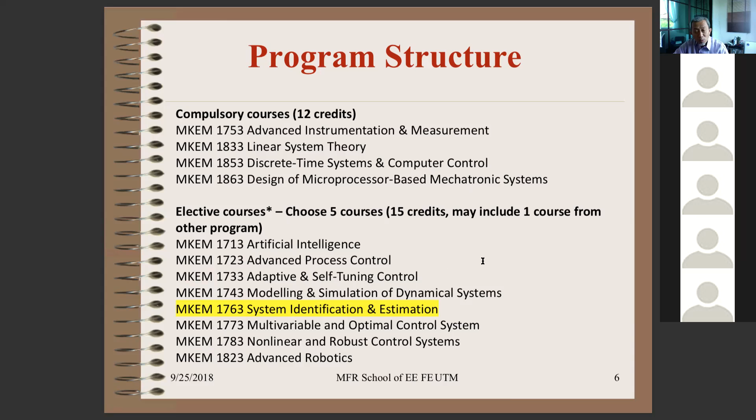And then another 1 course, if you want to take MKEM, also can. But some students would like to take other elective subjects from other courses, which is MKEP on power system, or MKEL, the Master in Electronics Engineering, Electronic Telecommunication Engineering. For example, a student might choose wireless communication technology, offered in MKEL, or power system engineering in MKEP. It depends on you if you want. If you don't want, you can simply choose 5 from the MKEM elective subjects.

And then after you finish your subjects, about semester 2, you will take the MKEM projects, which is Part 1 and Part 2: Research Project Proposal and Research Project Thesis, totaling 10 credit hours. You also have to take other required subjects, which is one university subject, and Introduction to Research Methodology in Electrical Engineering.

So we come back to the subjects. The objective of the subject is to expose students to the theory of system ID and estimation, and at the same time introduce students to the basic concept of reverse modeling, or sometimes we call it empirical modeling, including experimental protocol, test signal, model structure, parameter estimation, and model validation.

So this course is an introduction to system ID and parameter estimation. It covers all the system identification procedures, starting from data collection, pre-processing data, non-parametric model, parametric model, analyzing, validating, and converting models, and system identification case studies. We will go one by one through the case studies, about 4 to 5 case studies.

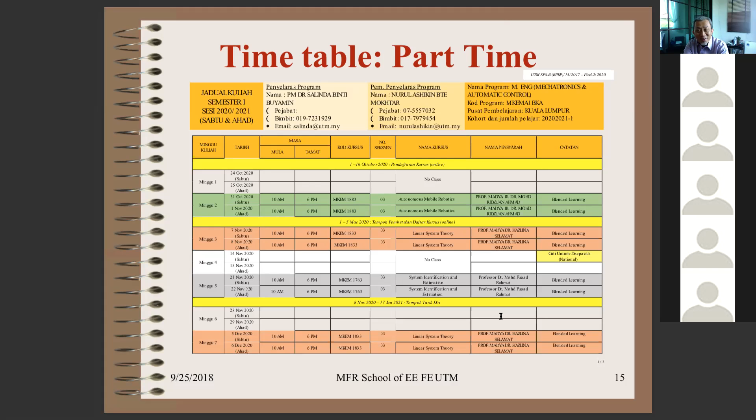Okay doktor, okay, jangan tidur pula. So seterusnya after.

21st and 22nd November class, so we will see again before Christmas, 19 to 20th December. So ini ada ujian rasanya, minggu 9 ni ada ujian.

Okay, so all the tests will be implemented using e-learning and Zoom. You will collect the exam question, the test question, download it, and then submit through e-learning at the time given, about half an hour. Katalah kita mula ujian pukul 2 dan kita tamat pukul 3:30 petang, dan 3:30 sampai pukul 4 petang tu adalah masa untuk awak PDF kan jawapan awak dan submit kepada e-learning. Semua ada e-learning? Everybody have e-learning? Ada? Yes, okay.

Okay, right, so similarly in test 2 also, we have a test 2 using e-learning and Zoom, and then we have some presentations at the end of minggu 14. Dan exam adalah pada bulan Februari, next year. Okay, clear?

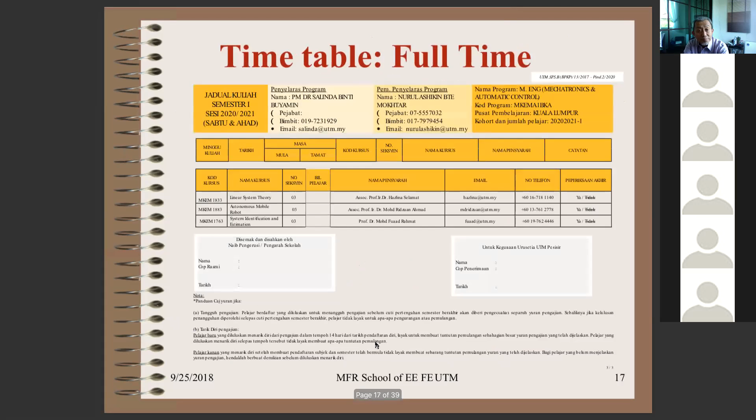So test will be on the 19th December, Saturday, okay. Then test 2 will be on the 23rd January. 23rd January, use di mana ni? Tak betul ni, 23rd January ialah berapa bulan tu? 23rd, tengok timetable tadi lah. 23 Januari pukul 2 juga. Okay, 2 p.m., pada 23 Januari.

So we will update the test time, all the details in the WhatsApp. Everybody subscribe WhatsApp. So total number of how many students currently? So we have Umar, Sivananta, Zulafi, Nur Fariza, Daniel, and Hazim. All are local, not international. Then final exam February 2021.

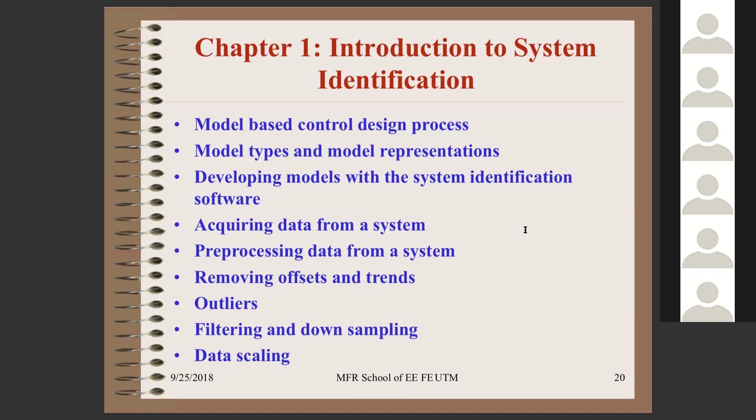So this is part time. So this is the content of chapter 1, introduction to system ID. So we will touch on the introduction, model, application of model, and some reasons why we have to use empirical modeling instead of first principle modeling.

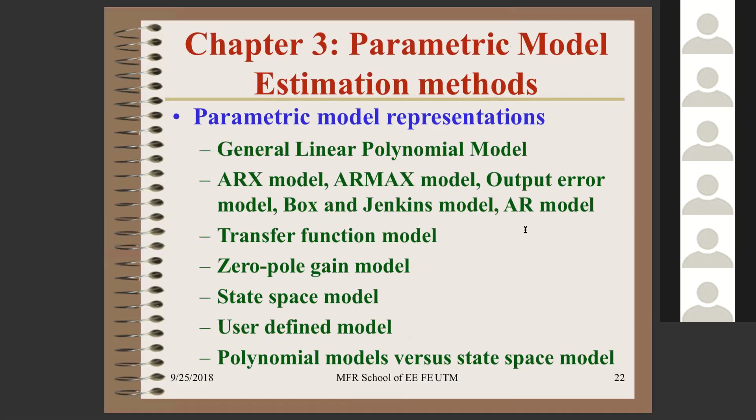And then in chapter 2, we'll see the time response, frequency response, impulse response, correlation, frequency spectrum, and PRBS signals for identification. And then we will go for chapter 3, which is the parametric model representation, type of parametric model, linear model and non-linear model.

And then semester break, I think kita tak ada semester break, kita carry on sebab kita part-time. Then chapter 4, we will go on the parametric model, which is estimation method, some methods which is least square, generalized least square, recursive least square, prediction error, model validation method, and so on. And then we will end this course with chapter 5, case studies, using data, real data from a hot air blower system, hydraulic actuator system, pneumatic actuator system, biodiesel engine, DC motor control, and so on.

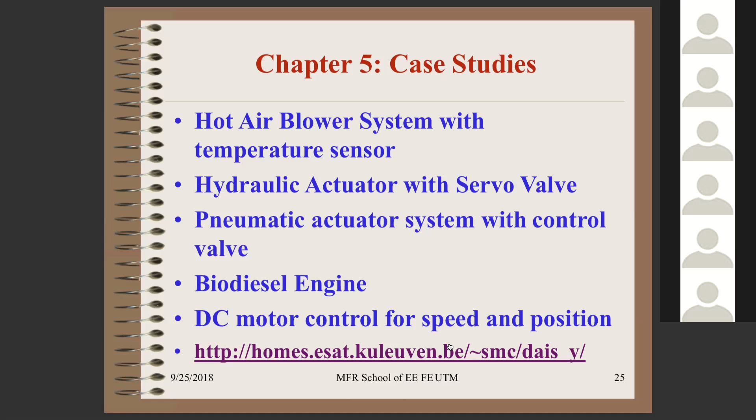Source of data is from the internet. We should share from some university from Belgium. Okay, we will use some data from there.

So to wrap up what I mentioned in the profile introduction, identification is the task of using input-output data to build a mathematical model. And this mathematical model is abstraction of the process. So I can say that...

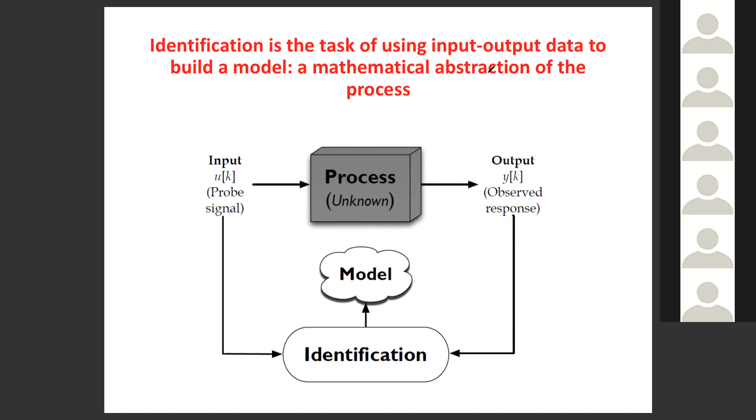So application of model in process system engineering can be divided basically into four main purposes, four applications.

First is for design. Why do we want to apply the mathematical model? Because we want to design the controller that can operate the process the way that we want. That's why we need to do some simulations, optimizations, planning, and scheduling on the process in order to do the design. Basically the basic design is the PID controller, or maybe higher than that, the fuzzy logic controller.

And then we need to estimate the parameters or the coefficients of the mathematical model. This kind of estimation includes predictions, advanced process control, sensors, filtering, and others. At the same time, we applied a model for control, because we want to control the system, we want to know the stability of the system. We want to do some design of the controller, perform some analysis, and take some assessment from the process data that we capture.

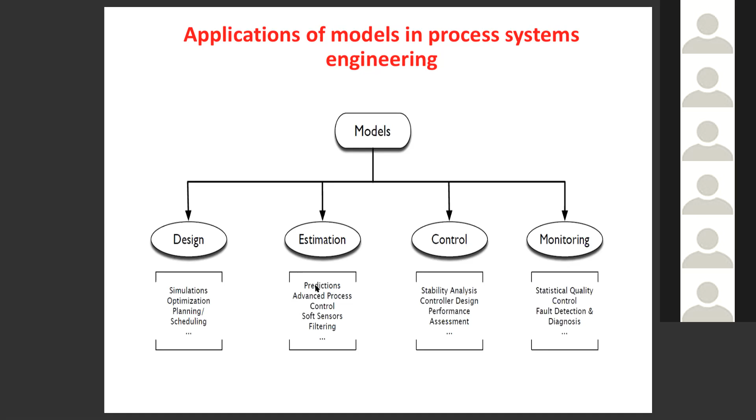It's similar to a car that we drive. After 5 years, some parts start to break, some parts stop functioning well, including all the sensors. That's why we have to estimate fault detections by taking the data and monitoring it. If there is some indicator from the data meaning it's not working, it will give outlier data. The outlier data is the sign that the parts of the system are not working anymore.

So in order to do the mathematical modeling, we have two ways. First is the first principles, or we call it fundamentals. The second is the empirical, or we call it data-driven. Data-driven meaning that we have the data, and the data will speak for itself.

In fundamentals, we have to write the conservation equation, the constitutive law. For example, Kirchhoff's law, Kirchhoff's current law, Kirchhoff's voltage law, or in mechanical it's Newtonian equations, in chemical engineering it's the mass flow equation, and so on. We have to understand the fundamentals, then derive the equations, and come up with the differential equation and transfer function or state space model that represents the system.

This is quite tedious because it's fully mathematics. But at the same time, we can also take the process, give an injection of input, then tap the output. We collect input and output data, perform analysis or experiments, propose a model, estimate the parameters, and then compare. We compare and see that it can be close to each other in terms of structure and parameter coefficients.

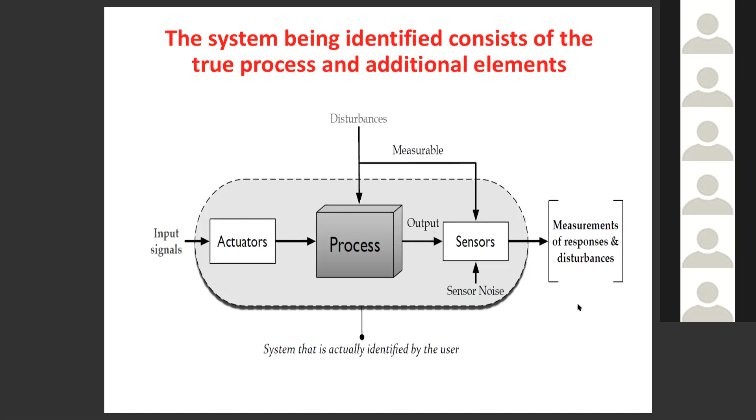In order to do system ID, generally we have a procedure for it. First is we have to do experimentation, which is the process. We have to collect the input-output data, including the noise, including the output, and including the input. This data will be lots of data.

From the data, we will visualize it, plot it in 2 dimensions to see the XY graph. Then we estimate the criteria. We select the candidate model structure and do some non-parametric analysis, for example impulse test, squared steps test, and frequency response test. From there, we will estimate the mathematical model structure.

In order to validate, to make sure that this model estimation is correct or not, we have to use some model quality assessment, or we call it model validation. For example, we have residual analysis, estimation error analysis, and cross-validation. As long as the model quality assessment fulfills this residual analysis, error analysis, and cross-validation with a certain percentage and a certain error, if we are satisfactory with it, we choose that model to be the representation of the process, the unknown process given.

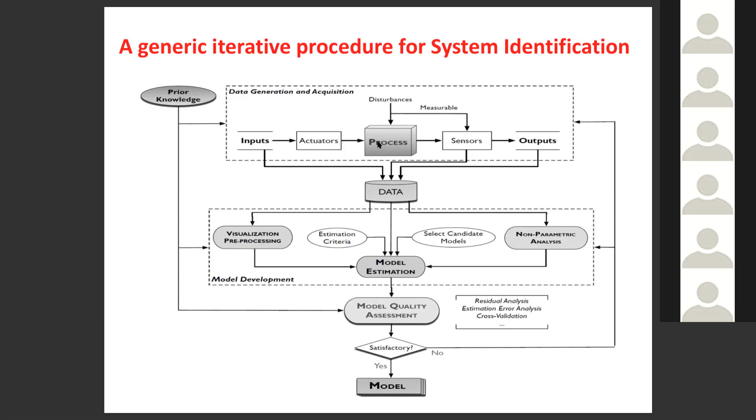That's why in order to do empirical modeling, we need a standard sampled data system. We need a computer, we need a laptop, we need an analog to digital converter and digital to analog converter. For example here, there is a digital to analog converter to the actuator and the process.

So the process is analog signals, and then this analog signal will be sampled by a sensor, will be sampled by a converter, and you convert the analog signal to voltage, and this voltage will go to the computer system to process, and we will give the output to compare with the input and output in order to derive the mathematical model.

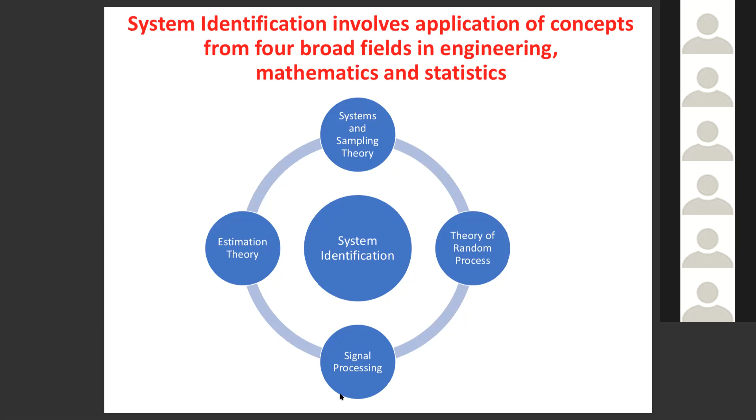So for system ID, it involves application of concepts basically from 4 broad fields, generally in mathematics and engineering, mathematics and statistics. So in system ID, we will cover system and sampling theory, theory of random process, signal processing, and estimation theory.

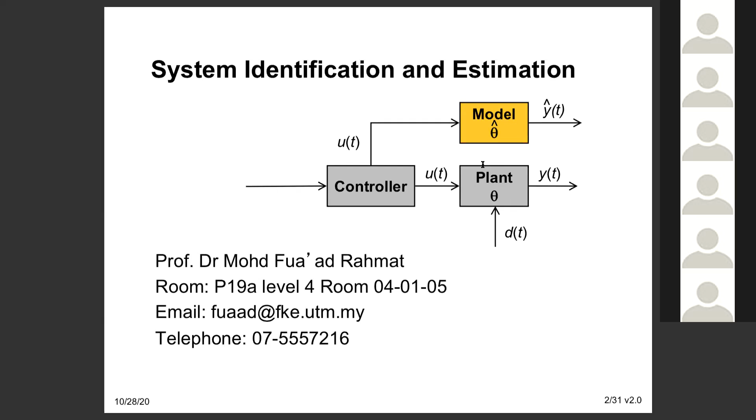So basically we are trying to estimate the model, the plant. Estimate the plant here, which is represented by theta, with the estimated model in yellow, represented by theta hat or theta cap.

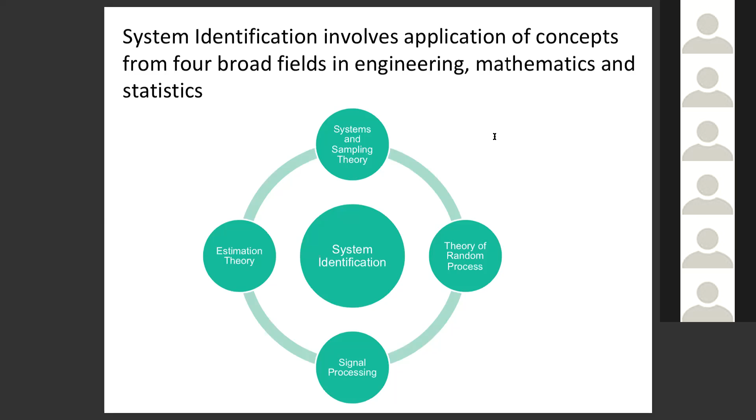System ID, as I told you before, involves application of concepts from 4 broad fields: sampling theory, theory of random process, signal processing, and estimation theory, that build up to the knowledge of system ID. In more detail, it involves linear modeling, least square estimation, recursive parameter estimation, model selection, self-tuning control. We are using software, which is MATLAB Simulink.

So all students are required to install MATLAB and Simulink in your own laptop or desktop. Please install MATLAB and Simulink. And then it involves some statistics, ordinary differential equations, and linear algebra.

So some elements of the course are non-parametric and parametric modeling, least square and recursive parameter estimation, model selection, and some case study. It will involve discrete time system ID as well as continuous time representation. Discrete time involves Z or Q in discrete time, while continuous time is in S domain, in frequency domain.

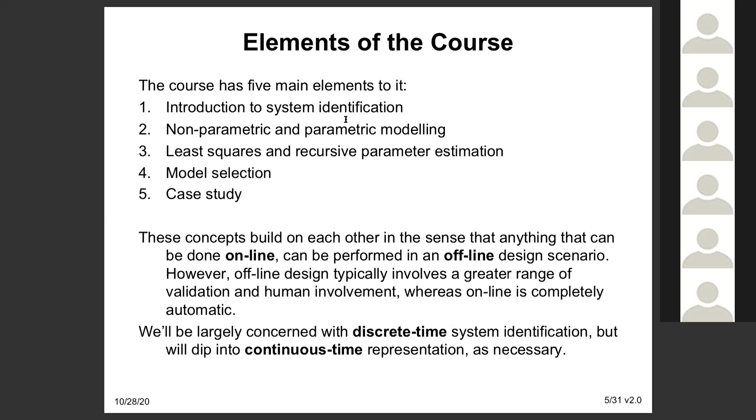And system ID can be implemented online and offline. Online meaning we measure online and we process online. But offline, we record the data, then we switch off the equipment and bring the data back home or to the office, and then we analyze it from there. That is considered an offline design scenario.

So system ID involves mathematical modeling of dynamic systems based on a set of measured stimulus and data samples. It covers a lot of disciplines: mechanical engineering, biology, physiology, meteorology - meteorology is something to do with weather forecast - economics, and model-based control design. So we are focusing on the model-based control design.

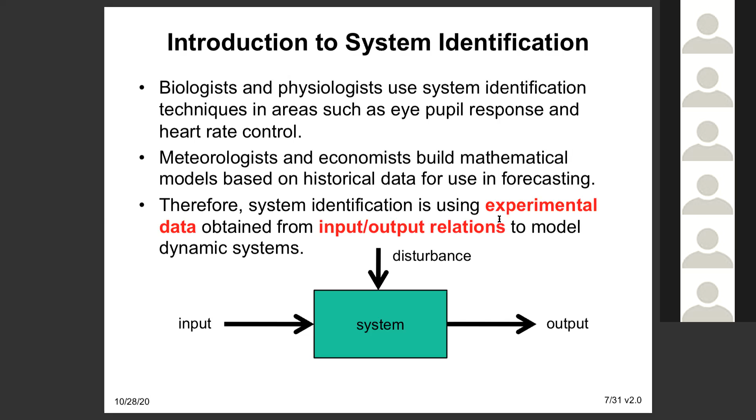So the concept is about the same: you have the input, you have the disturbance, you have the output, and from there we can execute the experiment, capture the data, and find the relationship between input and output that suits the mathematical model of the dynamic system. So our subject will focus on the model-based control design process.

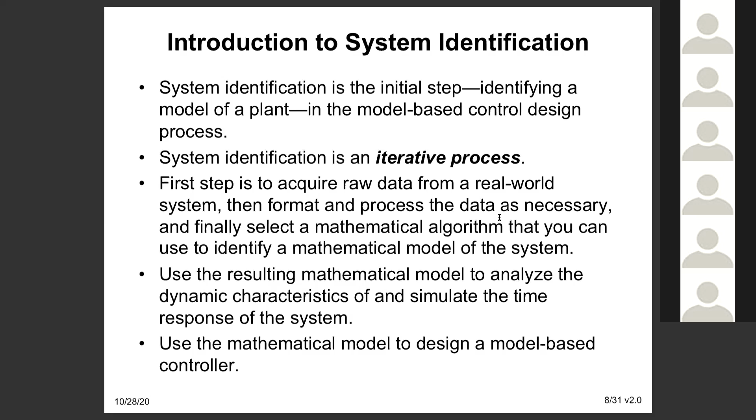It is an iterative process, dia berulang, the looping. First step, we capture the data from the real world. Then we do some processing as necessary, and select the mathematical algorithm to identify the suitable mathematical model. As a result, we simulate the time response of the system to see whether it has any contradiction with other methods as well.

System identification, the term introduced by Zadeh in 1956, refers to the problem of determining the input-output relationship of a black box or modeling based on observed experimental data. System ID is the process of determining, by means of practical testing, the transfer function or some equivalent mathematical description of the dynamic characteristics of a system component.

As you know, mathematical model-based control design can be written as the transfer function, or it can be written as... Can you see what I'm writing? Yes doctor, can you see? Yeah, I can.

So, transfer function. Sometimes we call it TF, sometimes we call it G, which is Y over U. Y is the output, U is the input. Then we have a numerator polynomial divided by a denominator polynomial.

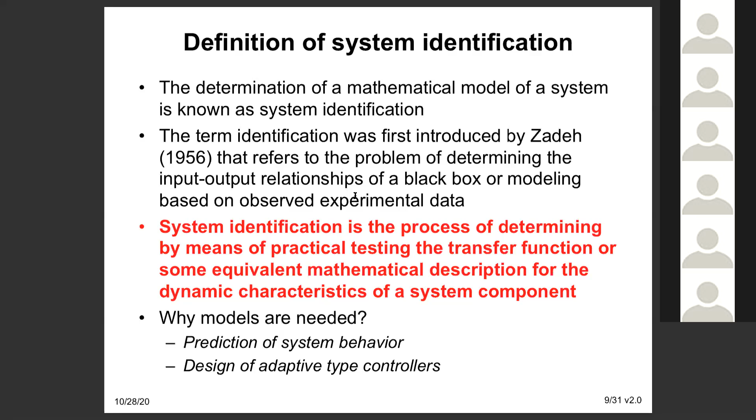As I told you before in the previous diagram, this is the definition of system ID, where you have a process, you take the input and output, and you predict the mathematical model. Model is estimation, approximation, simulation, or numerically calculated, but process is the real thing.

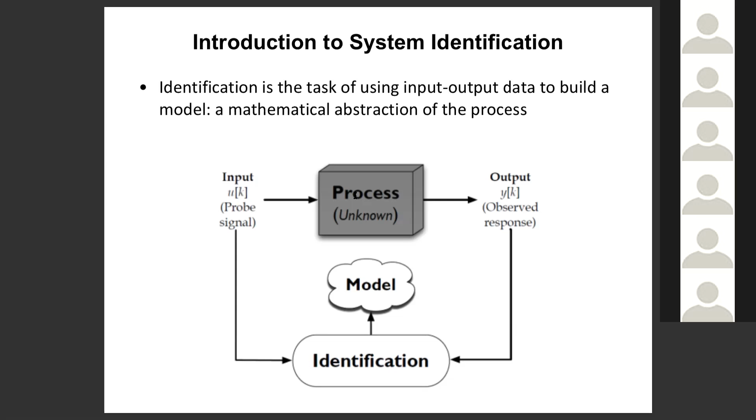Some books define system ID as the methodology for building mathematical models of dynamic systems using measurements of the system input and output. The process needs to measure - you need hardware, you need a computer, you need an A to D, D to A to capture the data. You need a model structure, either linear, non-linear, first order model, second order model, or higher order model.

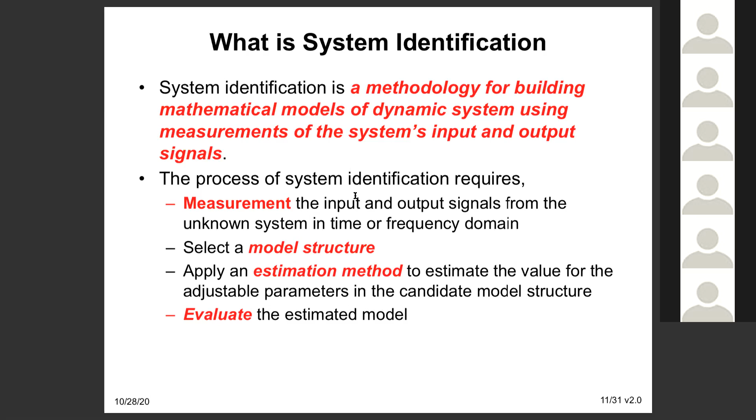Then we have to apply an estimation method in order to estimate the value of the adjustable parameters, because the parameters always change in value if the system is dynamic. Then you have to evaluate the estimated model so that the estimation method is verified and validated based on the evaluation analysis.

The objective of SI actually is to obtain a parsimonious model that adequately represents the system. The word parsimonious is sometimes never heard before. A parsimonious model is a model with as few parameters as possible for a given quality of model. Some people define process as a higher order system, sometimes 20th order, 30th order, and so on. But if we analyze carefully, we can minimize the parameters as small as possible that represent the quality of that particular model for the process.

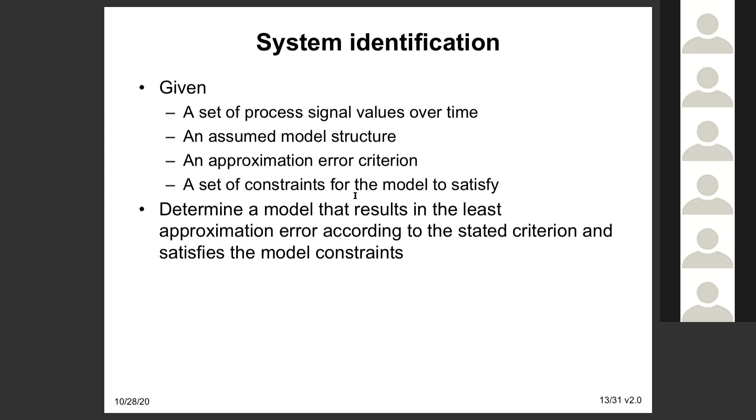So given a process signal, if we are given a model structure, error criterion, and the constraint, we can determine the mathematical model that satisfies the process.

This is the diagram that I've shown before. You can see that this output Y and Y-hat are not the same. Y-hat, the symbol with the hat, means estimation, while without the hat it means the real value from the plant. And of course in the plant there is a disturbance and there is an input from the controller with the standard references set by the user or designer.

The model will transform an input signal into output signals, and this will be represented by a differential or difference equation. Differential corresponds to continuous time, difference equation corresponds to discrete time. Both are not the same because they are from a different domain.

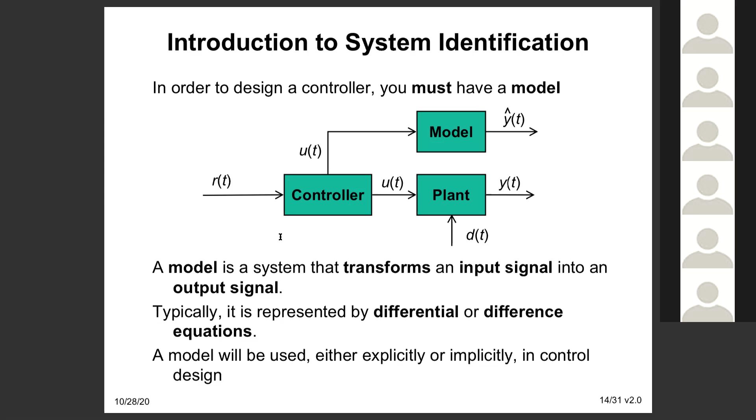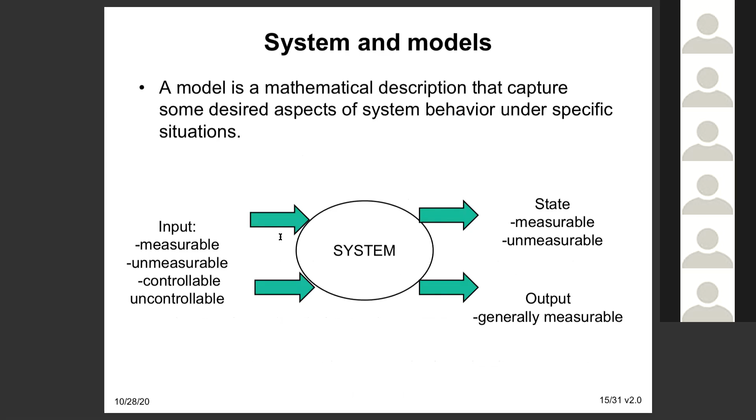So the input of the system can be measurable or unmeasurable, controllable or uncontrollable, because we never know what will happen in the system. That's why we must analyze the behavior under specific situations.

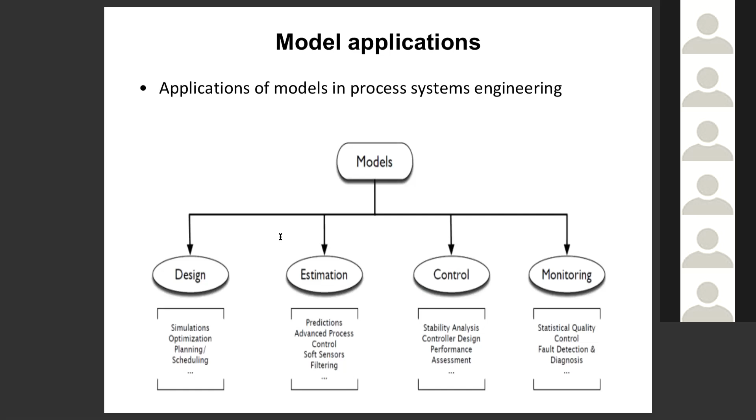We can approach designing the model based on two methods: one is first principle, and one is empirical. First principle is quite tedious, full of mathematical derivations, while data-driven modeling is more about handling the data, pre-processing it, and processing it using a suitable algorithm and model structure.

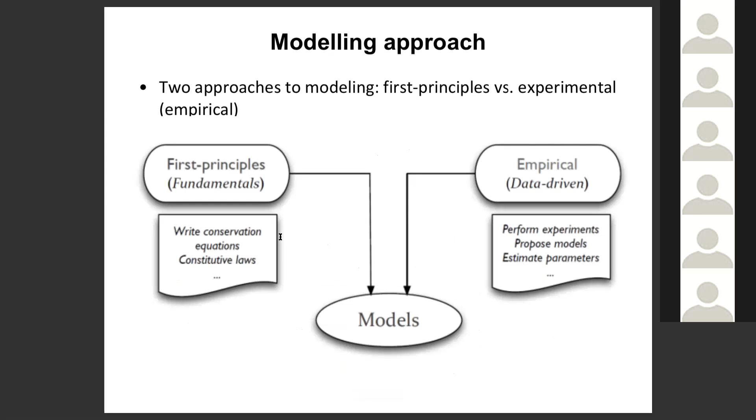So we let the data speak for itself. If we take data from a human body, it can be huge data. For example, for scanning data, we have to use an MRI because our body consists of a lot of soft tissues. If we use X-ray, that is not suitable for soft tissues.

Soft tissue is very soft and cannot be detected by X-ray. That's why we have to use MRI, magnetic resonance imaging, to detect the structure of soft tissues in the bone or outside of the bone, so that it can be plotted accordingly. Then we give the film to a doctor, and the doctor can diagnose the problem with our body based on the data plotted in the pictures of the film.

And it's similar for a car, including cars for disabled persons. All can be captured, and the data will speak for the system, the real behavior of the system.

Of course, when we compare analytical modeling and empirical modeling, there are pros and cons for each. For example, in physical modeling, let's take one example, the suspension system.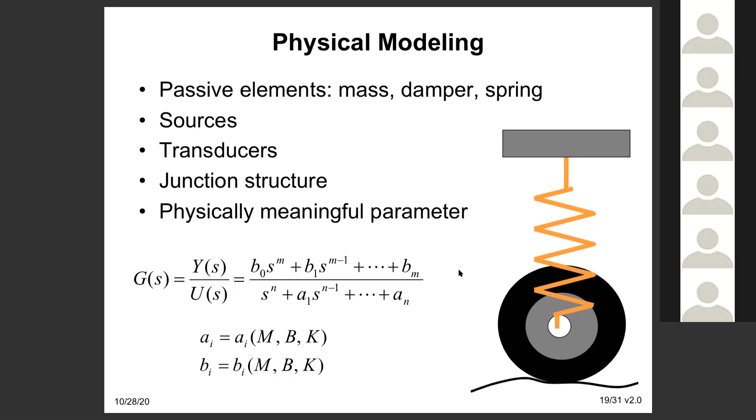For the estimated suspension system, G stands for transfer function, Y stands for the output, and U stands for the input. Y has a numerator polynomial, while U has a denominator polynomial, where A is a function of M, B, and K, as well as B.

So in empirical modeling, we assume the suspension as a black box system. We never know what's inside - we never know the coefficient of the mass, the spring, or the damper. But we measure the input and we measure the output. That's why from there we can also derive the empirical model that represents the black box of the suspension system.

If somebody asked me which one is good and which one is bad, I would say both are good - both have good points and both have bad points.

So the advantages of physical or analytical modeling: we have physical insight and knowledge. We know the mass, spring, and damper, and we can refer to the manual for the constants and coefficients. And the model lets us conceive the system before hardware is built, meaning we can simulate the mathematical model before designing the real system under determination.

But the disadvantage of physical modeling is that it often leads to a high system order with too many parameters, which is complicated. The more complex it is, the more difficult it is for us to analyze, since the input-output model has a complex parameter structure. This is also not convenient for parameter tuning, and too difficult to analyze due to the highly mathematical style of derivation.

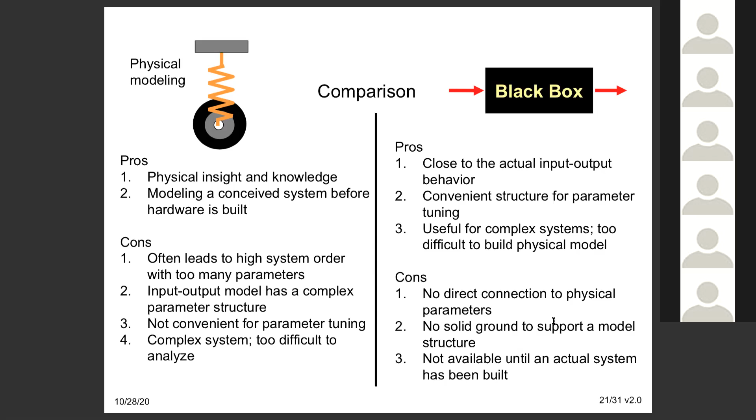We guess based on the scientific data, and this is not available until an actual system has been built. Of course, we need the system. Then we can assume it as a black box, and from there we can carry out the protocol of data collection.

So this is the dynamic model for a car, which is considered dynamic because it has 4 tires and 4 suspensions, and the parameters of the car's mathematical model are dynamic. It can change from time to time, based on the road profile.

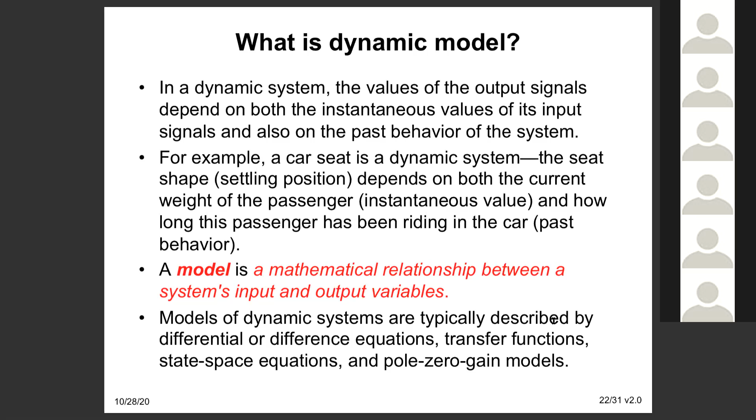Since we want to derive the system ID based on input-output, we must have the data, which can be represented in continuous time and discrete time form. For example, this is the sample, just now.

If you see here, we have one mass, one spring, and one damper, represented by their constants M, K, and C. The force is applied from left to right, capital F. When the force is applied, the mass will be displaced, moved to the right, with displacement Y of T.

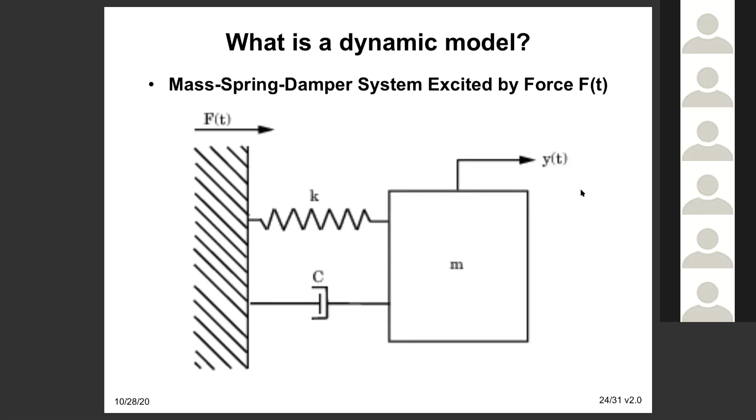Physical systems like this, which we learned during undergraduate studies, can be assumed as a second order system based on a second order differential equation. So what is the definition of a second order system? It's a system that has two poles, located at the left half plane of the S-plane.

In this case, the differential equation is given by M y double dot, C y dot, plus K y equal to F, where K is the spring constant, C is the damping coefficient, and M is the mass.

We can solve this using the differential equation, where we assume the velocity V is dy/dt, which is the derivative of displacement. So y dot equals A y plus B f, and v equals C y, where y of t is displacement and v of t is velocity - these are the state variables of the model.

From there, we can derive the important matrices for the model: A, B, and C, which are the system matrix, input matrix, and output matrix. And we find the mathematical model is 1 over (m s squared plus c s plus k), where s is the Laplace variable.

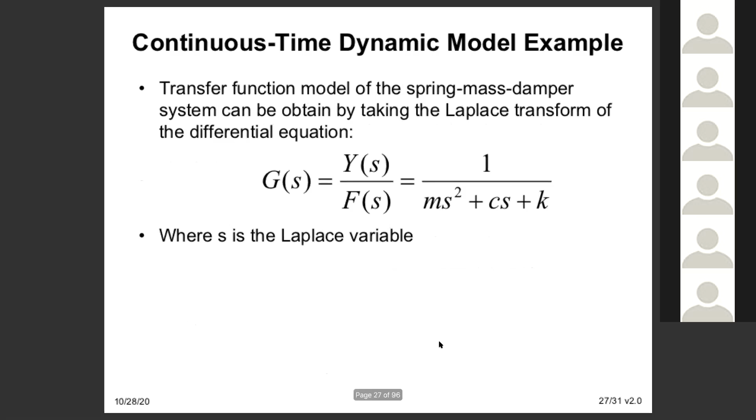So in other words, that is considered a continuous time dynamic model. So what is the discrete time dynamic model?

Discrete time dynamic models, based on the same mass-spring-damper system, require us to use a sample and hold process. We have to do the sampling using TS, the sampling time or time interval, carried out over a certain period, maybe 1 or 2 minutes, so we have to introduce a sequence.

N equals 0, 1, 2, 3, 4, 5, 6, until the data finishes capturing. So in this case, 0 is the initial sample, 1 TS is the first sample, 2 TS is the second sample, then the third, fourth, and so on.

From there, we can build the relationship between the sampled input and output using a second order difference equation. This is what I call a difference equation, and you can see it's different from the differential equation. Y is the output, U or F is the input, and A1, A2, and B are the parameters or coefficients we have to estimate in order to find the mathematical model.

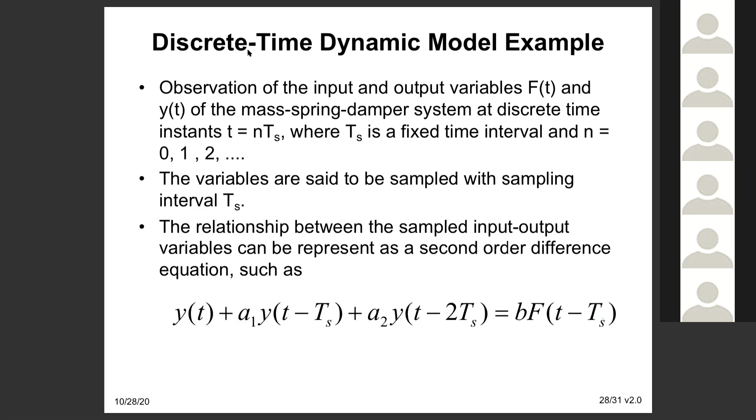For simplicity, TS is taken as one time unit, and the equation can be rewritten as: Y(T) + A1 Y(T-1) + A2 Y(T-2) equals B F(T-1). A1 and A2 are the model parameters we are going to estimate, which are related to the system constants - mass, spring, and damper - with the sampling interval TS.

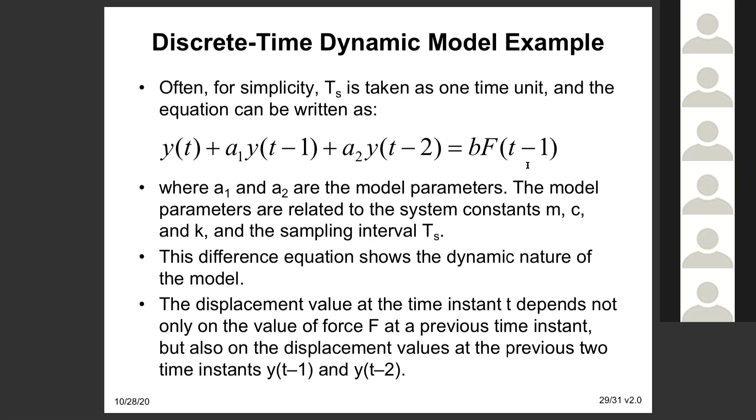The difference equation shows the dynamic nature of the model, and we can apply it to any process. We can also use a computer to compute the displacement at a specific time using this equation. When it's in discrete form, it's easy for us to calculate using the mathematical model and a computer simulation.

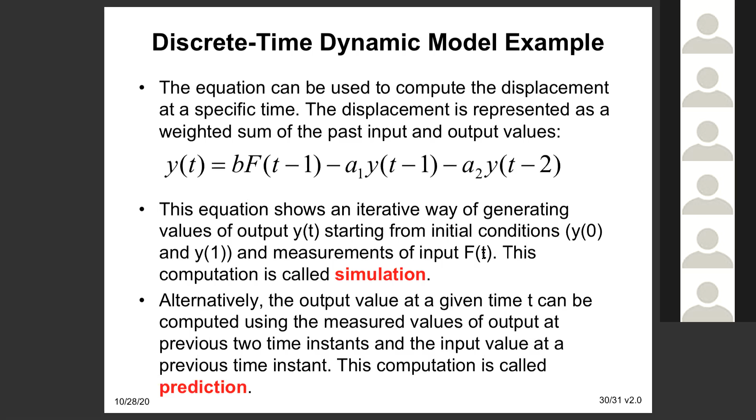And this computer simulation can use prediction as well, to predict what will happen in the next stage of time. So it was similar to what I described before. We can apply identification in certain cases.

For example, this is a real case taken from Leonard Ljung's book on System ID, where they applied it to a solar heated house. Solar heated houses are not suitable in Malaysia due to our hot and humid weather, but they are suitable for European countries, where they capture solar energy using a solar panel, and from the solar panel they activate the pump.

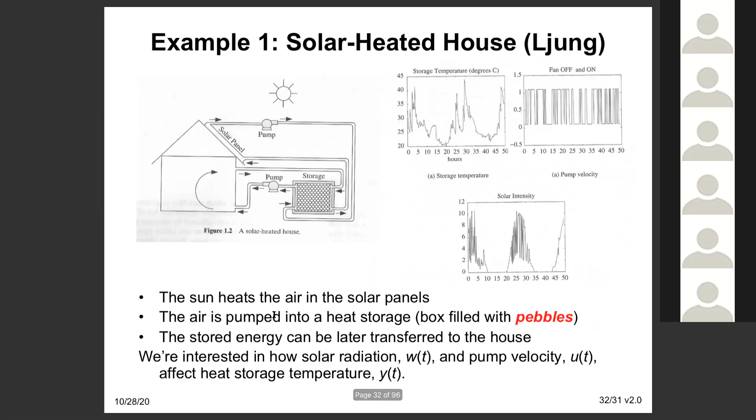That is a sample for the solar heated house. The other example is the Swedish fighter aircraft. Since this is for an aircraft, you can apply it to construct the mathematical model. We know that the hardware of the jet fighter is complicated, so what we need is data on the pitch rate, leading edge flap, elevator, and canard — all data in voltage versus time — to compute the mathematical model.

Example 3: we can apply identification in the laser eye surgery system, used by ophthalmologists to remove cataracts from your eyes. For those who don't want to wear spectacles anymore, you can do this operation — we call it LASIK surgery using laser. This laser system cuts your cataracts so you are no longer short-sighted or long-sighted; it's removed by the laser, but this procedure costs quite high.

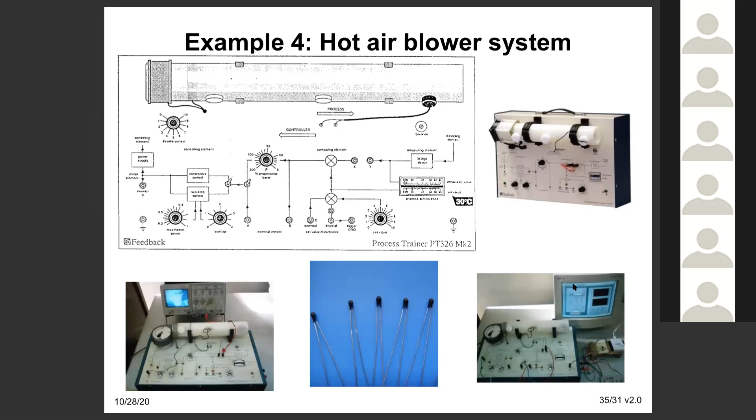The left eye maybe 5,000, the right eye maybe 5,000, so a total of 10,000 is needed to run this surgery. One thing is the hot air blower system that's used in many industries to heat up something. So the hot air blower system is also under study in our subjects. We will analyze it and apply system ID theory to do the mathematical modeling of a hot air blower system.

Example 5 is the hydraulic actuator system. This actuator is hydraulic based, using oil as the medium. The input is the electrical signal and the output is the linear displacement of the shaft of the actuator, moving forward and backward. For this we need a cylinder, a proportional valve as the controller, and a positional transducer that measures the displacement of the shaft of the cylinder. It can be an LVDT, or any sensor that can measure displacement.

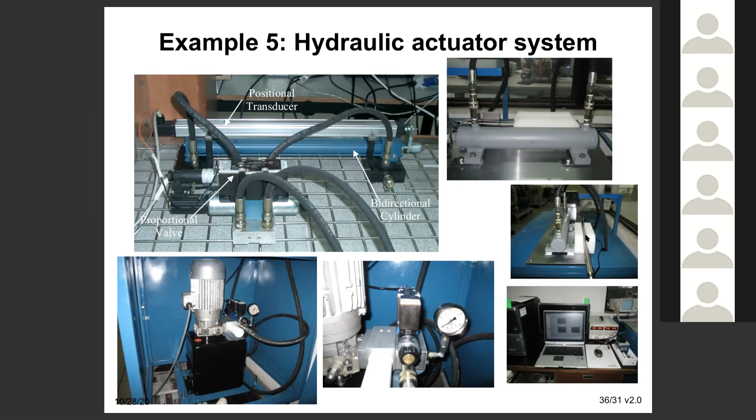There is a video for it, but I'm not sure whether we can run it. I believe we can't, it's in another file, never mind. We can show it later in chapter 5.

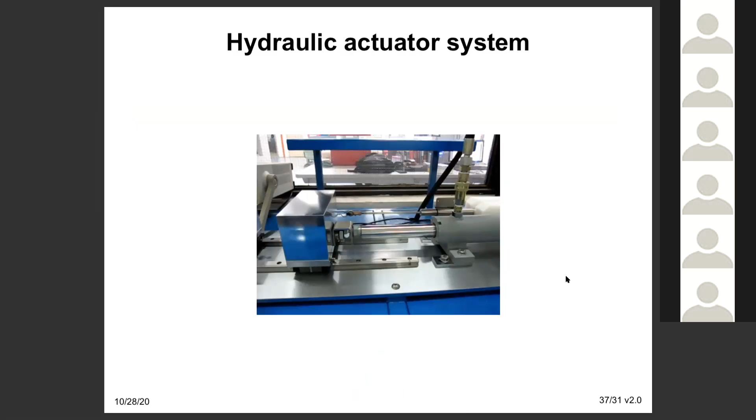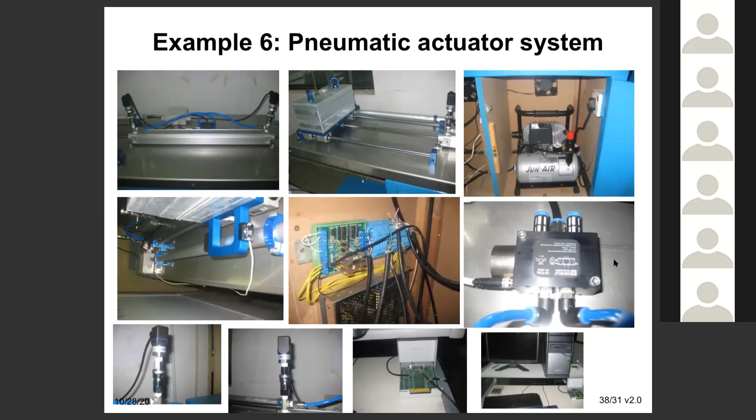Another one is the pneumatic actuator system. This is also an actuator, but the medium is not hydraulic, it's not using oil. It's just using pressure air as a pneumatic actuator system. This system can also do some displacement, where we use an electromagnetic sensor to measure the displacement along with the pressure sensor and the control valve as shown.

Video for this will be shown in chapter 5. And a DC motor as well. DC motor is a common thing in electrical, electronics, and mechanical engineering systems, because motors are used for several things in robotics and so on.

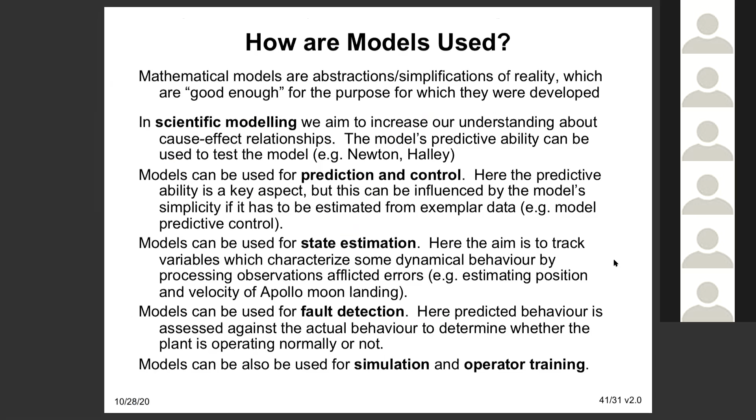So how are models used? As I told you before, models are applied in scientific modeling, prediction and control, state estimation, fault detection, and some simulation and operator training for monitoring systems. These can be models: some writers said it can be a cognitive model, normative model, descriptive model, and functional model. Actually we are on number 4, which is functional models for action and control oriented.

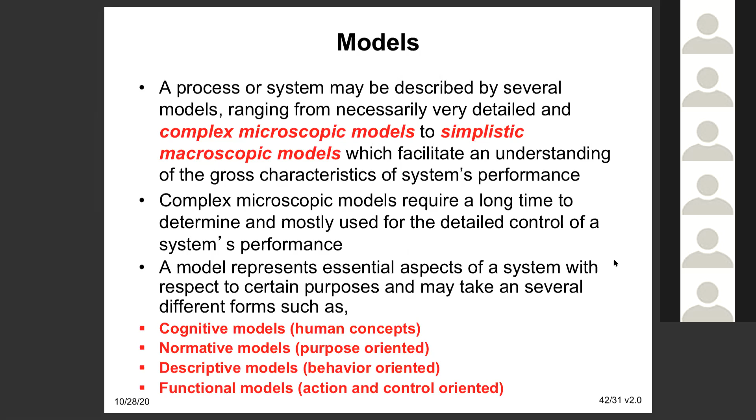Cognitive usually refers to the human concept. Normative usually refers to the purpose oriented. Descriptive always corresponds to the behavior orientation.

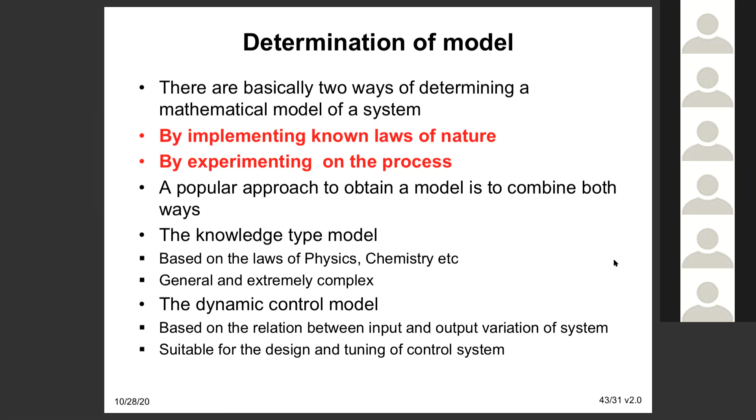But to determine the model, it can be done by implementing knowledge of laws of nature and experimenting on the process. Both can be done, both can be applied in knowledge type model and dynamic control model. The important thing is whether we understand and how to differentiate a linear and a non-linear model, or whether it is a parametric or non-parametric model.

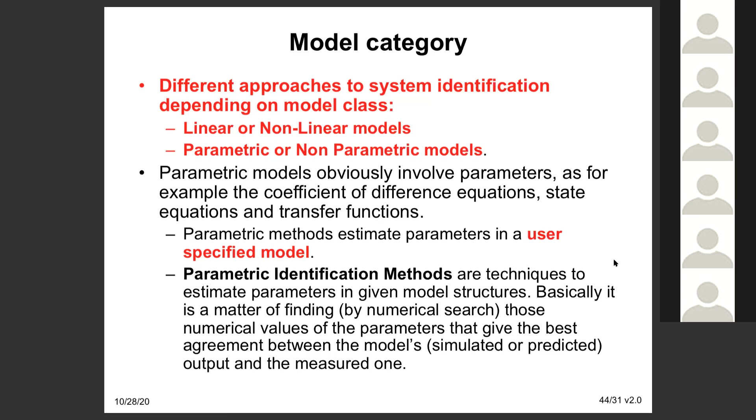This will be discussed in more detail in chapter 4, where we have to estimate the parametric methods in order to estimate the parameters. This method is basically more popular compared to the non-parametric method, because parametric identification method involves a lot of calculation with higher accuracy compared to the non-parametric method, which just uses graphics.

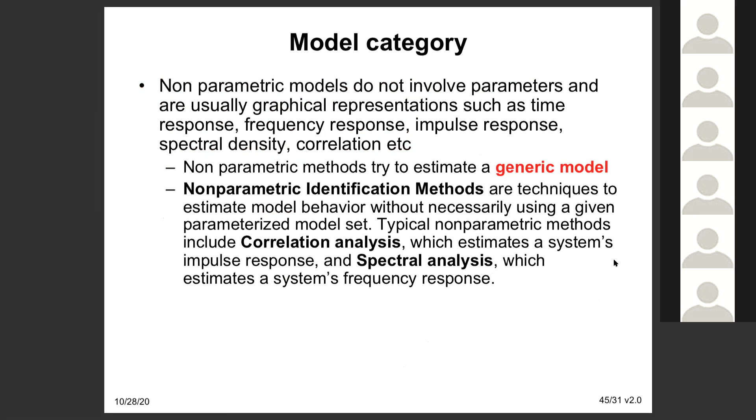Non-parametric method uses a lot of graphics, especially in time response, frequency response, impulse response, and power spectrum density. So we drag out information from this graphic, then estimate the value and parameters and construct the mathematical model.

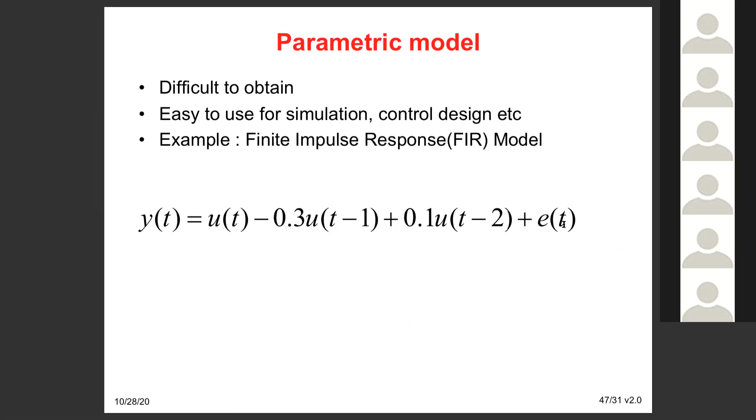But parametric method is something like this, no graphic, just equation, a difference equation. For example, you have a finite impulse response, y equals u minus 0.3, 0.1u, plus e, where e is the noise or disturbance. So if you have this equation, it's easy for us to do the simulation using a computer program.

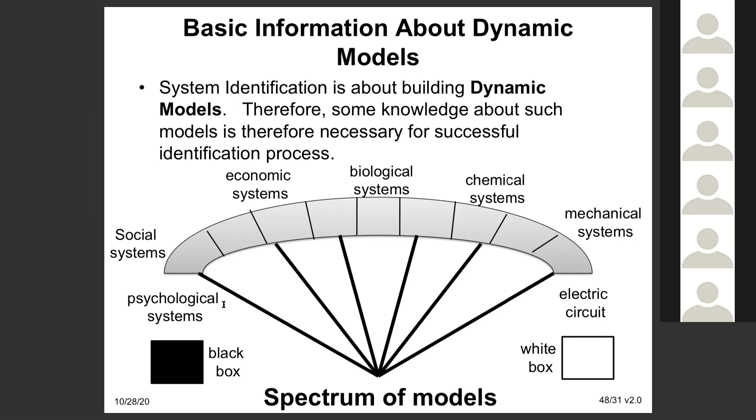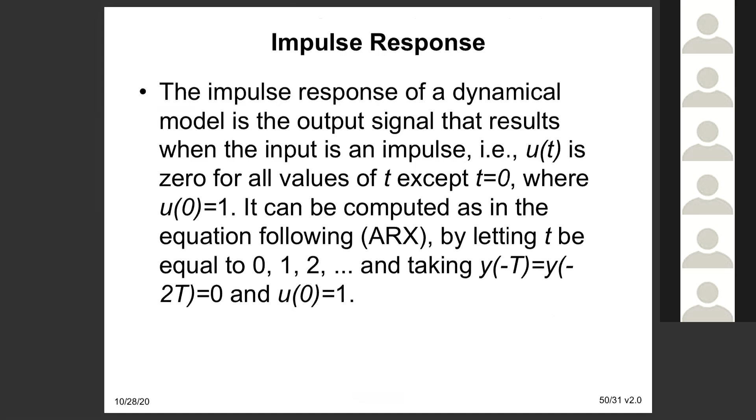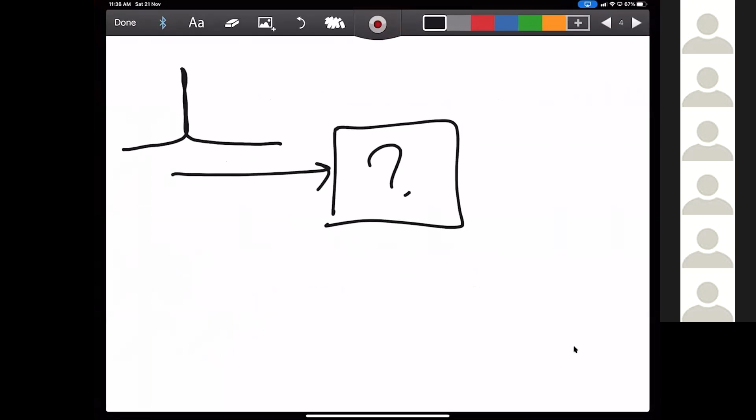So you have the unknown system here, and you have the injection. The impulse is something like this, very, very narrow pulse, and it can be plotted like that. So that is the output of the impulse.

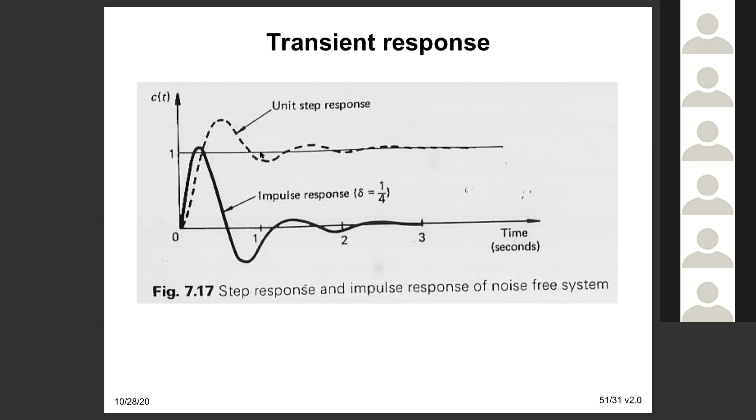Step response is much more popular and much easier to use compared to the impulse. Both are called transient response.

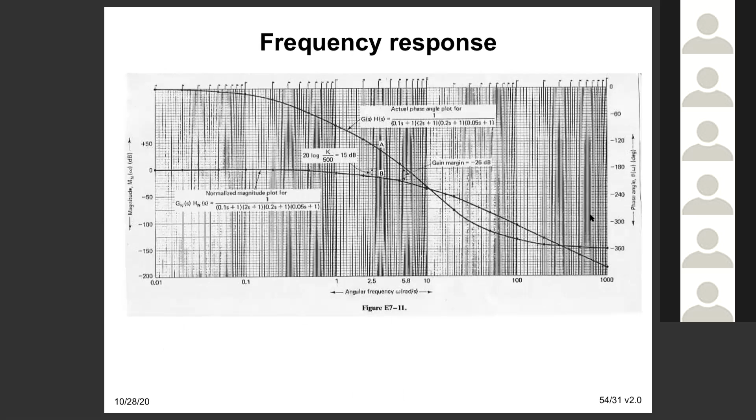But for the other one, frequency response uses a sine wave instead of impulse or a square wave. So we capture the output voltage, input voltage, and the phase difference between the input and the output. Then we produce something like a Bode plot, which is decibel versus frequency and phase versus frequency. This is a sample of the frequency response of a 4th order system.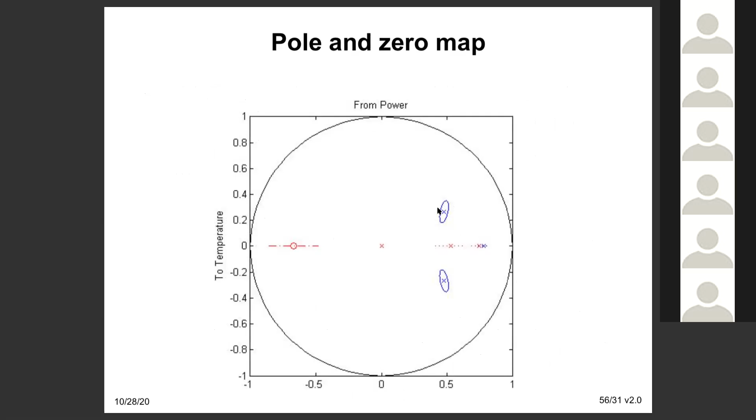Of course, when you have the mathematical model, you can differentiate the zeros and poles by splitting and factorizing it, then you can plot it in the Z-plane. For example, here the symbol of the circle represents the zeros, and the symbol of the cross represents the poles.

So identifying a system from the empirical data, generally we need knowledge. We have to gather all the knowledge, early knowledge, or what we call prior knowledge, before we do the experiment for the system ID. Therefore, we must categorize what the system is, whether it is a white box, gray box, or black box, depending on the prior knowledge.

If you have a lot of prior knowledge, 90% or above, you can use a white box approach, which is easier. First principle information is used to derive the full model. So system ID can be used to reduce the order of complexity.

But if your prior knowledge is about 50%, that is what we call certain structural information, where the model is already available, but the remaining 50% is unknown. So that is the challenge in using system ID.

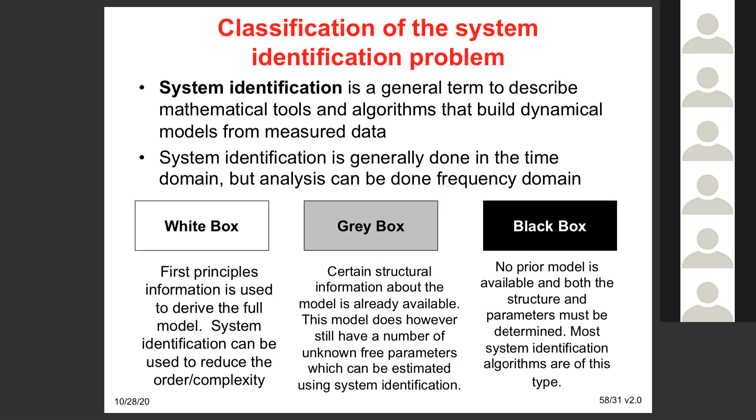And the black box is considered when you have zero knowledge, no prior model available, and both structure are missing, no idea about it. This is the challenge that we have to face. We have to design the system ID algorithm in order to cater for these black box problems.

So the explanation of it is in this slide, you can read it by yourself, regarding the gray box problem and the white box problems.

So can I conclude about it? Transient response is the pre-method for system ID before we apply special signals to identify the system. From the transient response, from the pre-testing, we can know the behavior, whether the system is first order, second order, or high order.

The frequency response is used to see whether there is a time delay in the system by looking at the phase response or frequency response, whether it is flattened at minus 180 degrees or deeper than minus 180 degrees. Then we check whether the system has a disturbance. If the system has a disturbance, we consider it stochastic steady state information, and we have to use pseudo-random noise data, which is PRBS, in order to generate a model.

So which one will we choose, either analytical or empirical?

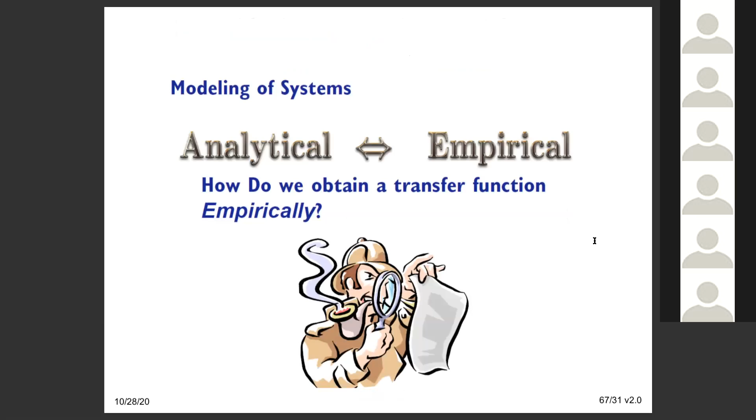So I choose empirically because it saves a lot of time and headaches. We construct the unknown plant here, we set up the computer which consists of A to D, D to A, then we generate the excitation signal, and then we design the identifier algorithm.

This identifier algorithm has a simple one and a complicated one, but those pursuing further studies for PhD or Masters should know that the identifier algorithm is considered a significant finding at the Masters and PhD levels.

So that is the system being identified, as I told you before in the previous hour, where we have sensors, actuators, and process, including disturbance in the real system ID. And to do that, we need a procedure.

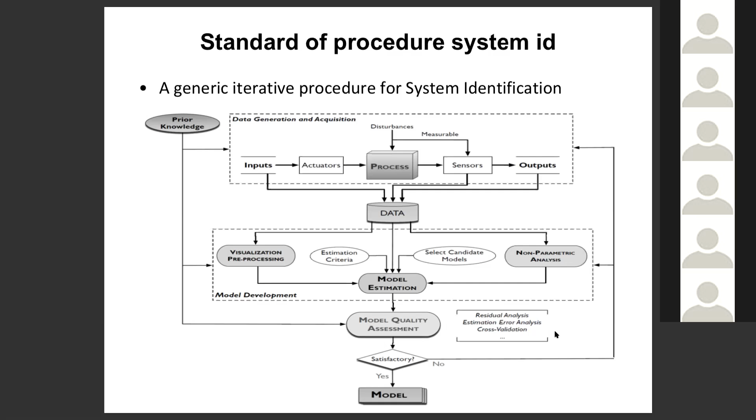So the procedure is: we have to gather the data, do the model structure selection, do the model parameter estimation, and then do the model validation in order to check whether the model is accepted or not. By using a standard sampled-data system, we can accumulate all the data.

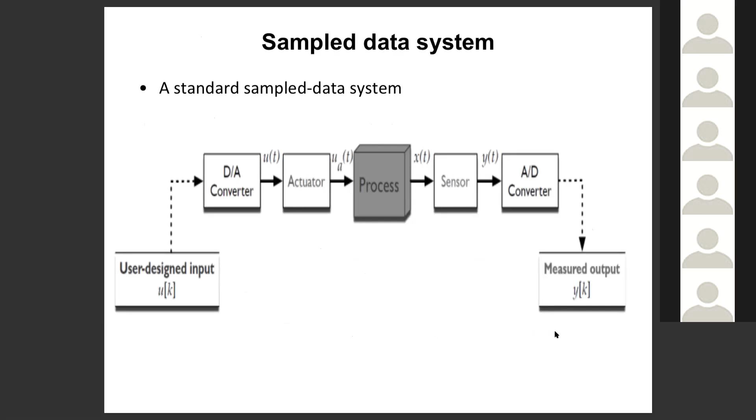This is very important. We have to choose what is the suitable sampling time in order to sample the data of input and output from the unknown process system.

In order to do that, we can use two software available: one is LabVIEW and the other is the MATLAB System ID Toolbox. I prefer to use MATLAB System ID Toolbox using MATLAB Simulink. We will use this software to estimate the mathematical model of the process, so please install this software on your laptop. We will use it in chapter 5 in the real case study.

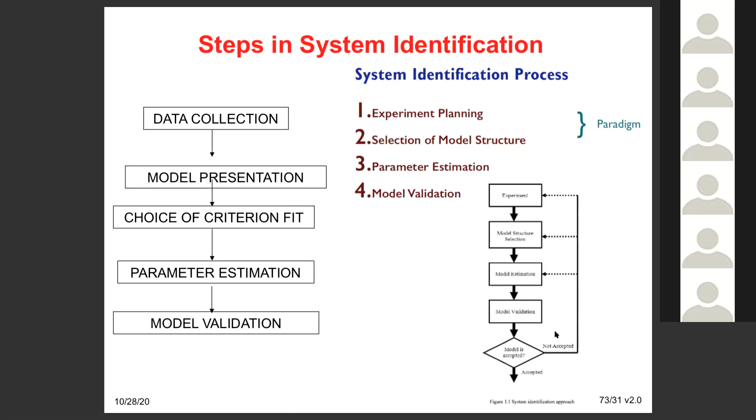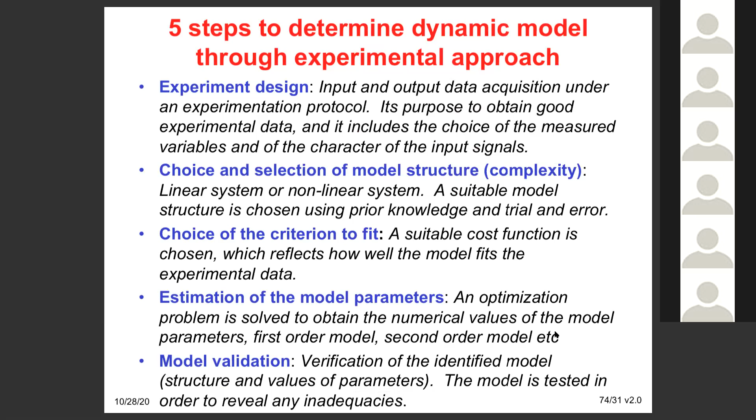So I can say that the steps in system ID consist of data collection, model presentation, choice of criterion fit, parameter estimation, and model validation. Or you can simply use 4 steps, also fine. The explanation of each protocol is shown here.

This shows the same explanation for each protocol, and the important thing is the data must be reliable, the data must be correct in sampling. Usually the sample time is based on the time constant. Rule of thumb is between 4 to 10 sample points over the rise time.

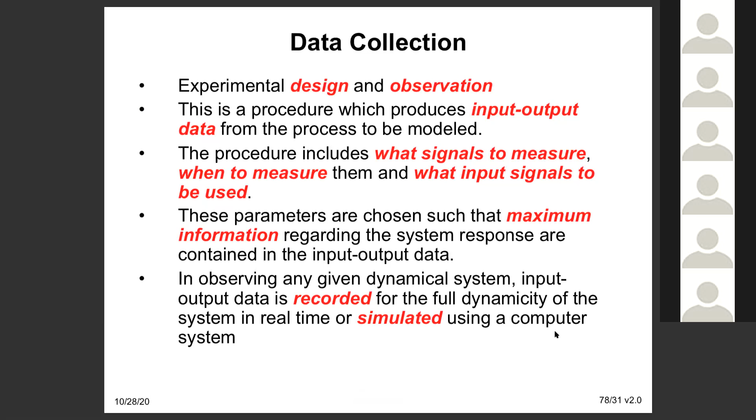The data must be recorded, making sure the signal to noise ratio is as high as possible. If the signal to noise ratio is low, most probably there is noise in your system.

Then we choose the input signal. The suitable input signal is the PRBS, pseudo random binary sequence, which we will learn in chapter 2, inshallah, including how to generate the pseudo random binary sequence.

And then we propose what do you call that, model structure or candidate models, whether it's a model of ARX, ARMAX, NARMAX, and so on.

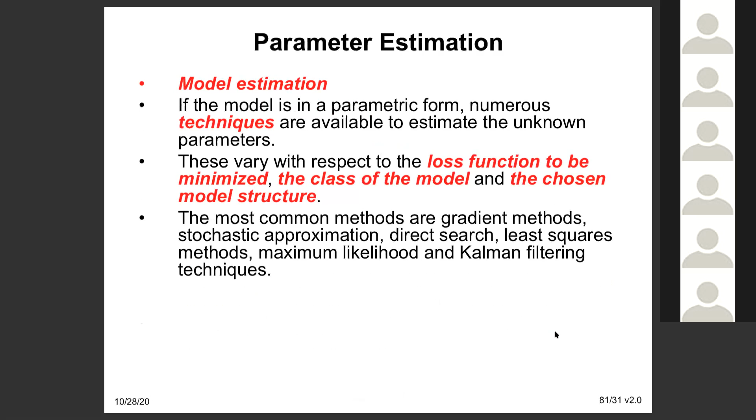Then we estimate the parametrical model using the estimation method, which is a recursive method—there's a lot of mathematics here. Then we estimate it, and make a validation to ensure the model is correct based on the validation criteria, usually using a statistic.

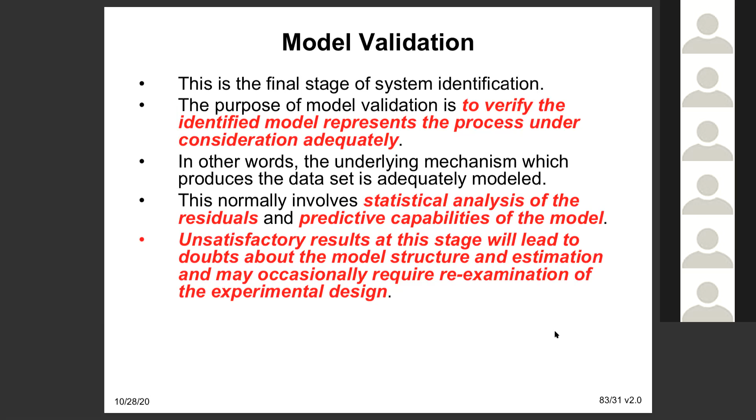This is some of it. So some basic questions of system ID you can read about, the questions and answers.

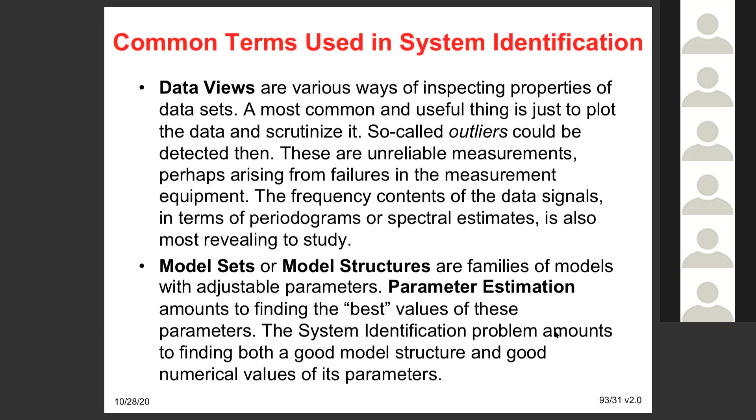And common terms used for system ID: estimation data, validation data, model view, data view, model set, model structure, and so on. There is also some exercise based on the book chapter, chapter 1 part 1. For details, you can read the books and then answer some of the questions.

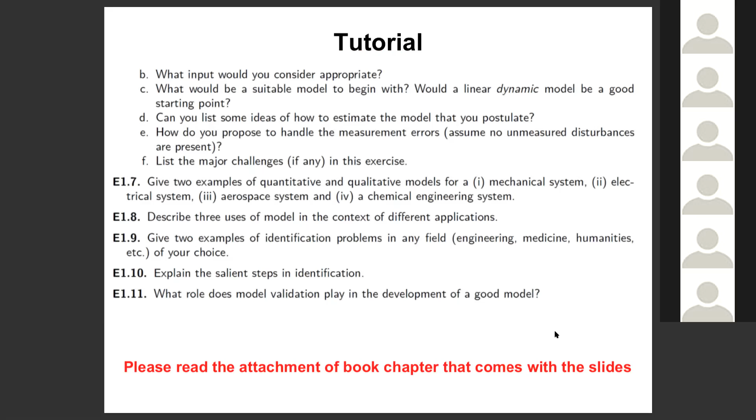Right, is there any questions?